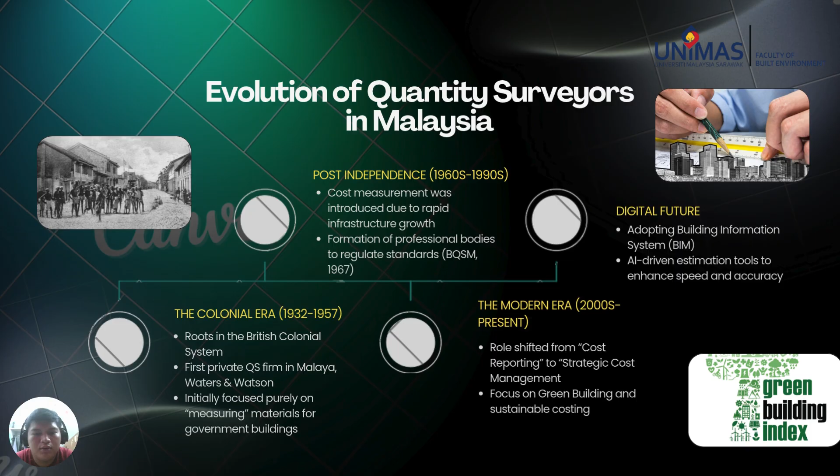The role shifted from cost reporting to strategic cost management, focusing on green building and sustainable costing. Right now, digital future, adopting building information system BIM, AI-driven estimation tools to enhance speed and accuracy.

We move to the next slide, about the role of BQSM and RISM. There are four roles. The first is type of organization: BQSM is a statutory regulatory body established under the Quantity Surveyors Act 1967, while RISM is a professional institution or association. The main purpose of BQSM is to regulate, control, and enforce standards in the quantity surveying profession, while RISM is to promote, support, and advance the surveying profession.

Legal authority for BQSM includes legal power to enforce laws and take disciplinary action, while RISM functions based on voluntary membership and professional cooperation. To become a member, you need to pay 100, and if you want to become a fellow, the fee will be 400.

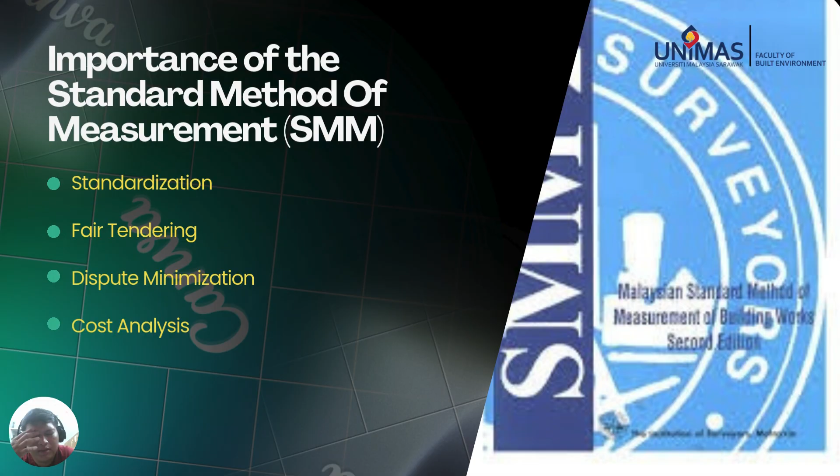Importance of standard method of measurement SMM2 is for standardization, fair tendering, dispute minimization, and also cost analysis.

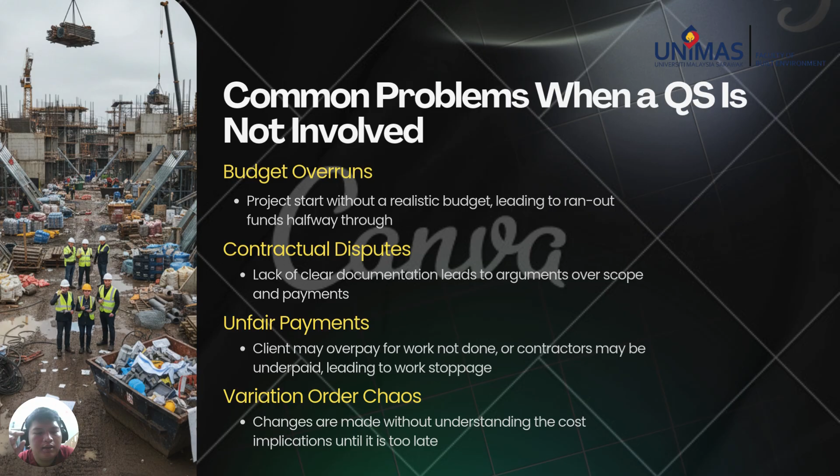Common problems when a QS is not involved include budget overrun: project starts without a realistic budget, leading to running out of funds halfway through. Also contractual disputes, lack of clear documentation, leading to arguments over scope and payment. Unfair payment also occurs when clients may overpay for work not done, or contractors may be underpaid, leading to work stoppage, and also variation orders chaos, where changes are made without understanding the cost implication until it's too late.

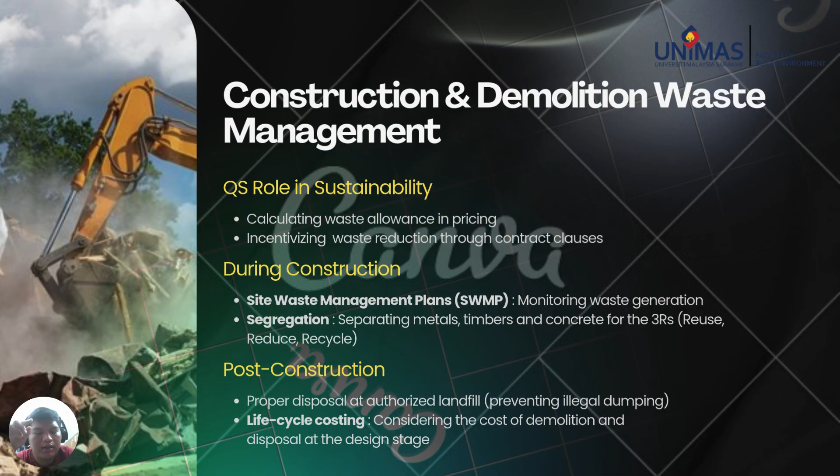And for post-construction: proper disposal at authorized landfill, avoiding illegal dumping, life-cycle costing, considering the cost of demolition and disposal at the design stage.

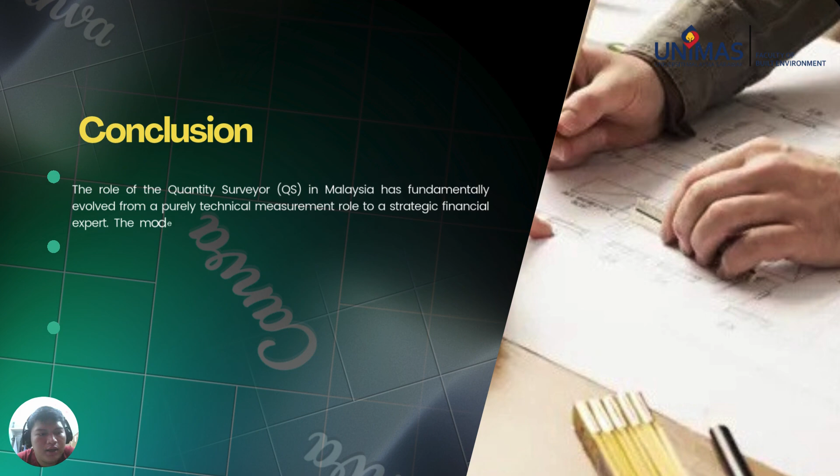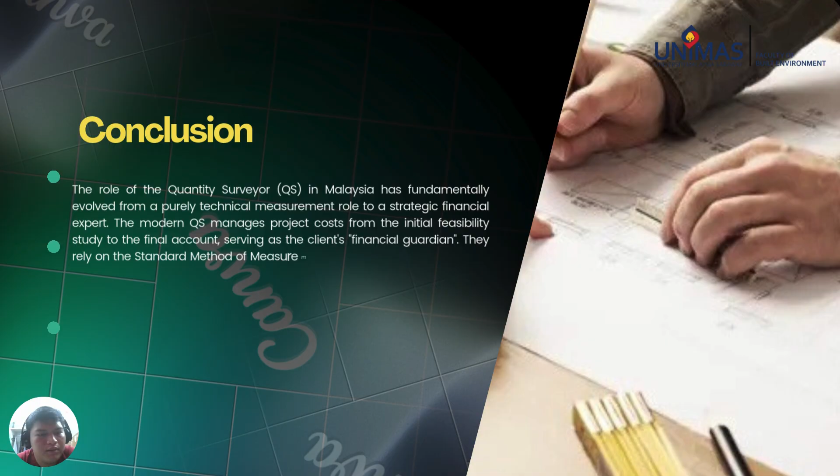So for conclusion, the role of quantity surveyors (QS) in Malaysia has fundamentally evolved from a purely technical measurement role to a strategic financial expert. The modern QS manages projects from the initial feasibility study to the final account, serving as the client's financial guardian. They rely on the standard method of measurement as a tool for fair tendering and must possess strong digital, contractual, and soft skills.

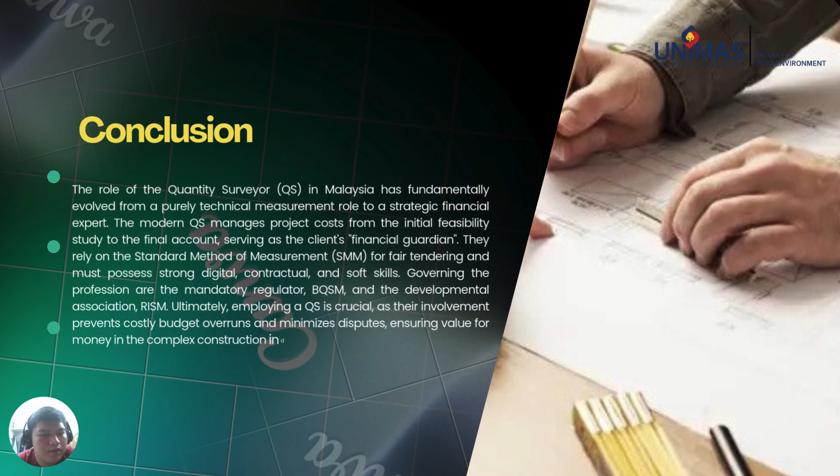Governing the profession are the mandatory regulator BQSM and the developmental association RISM. Ultimately, employing a QS is crucial as their involvement prevents costly budget overruns and minimizes disputes, ensuring value for money in the complex construction industry.